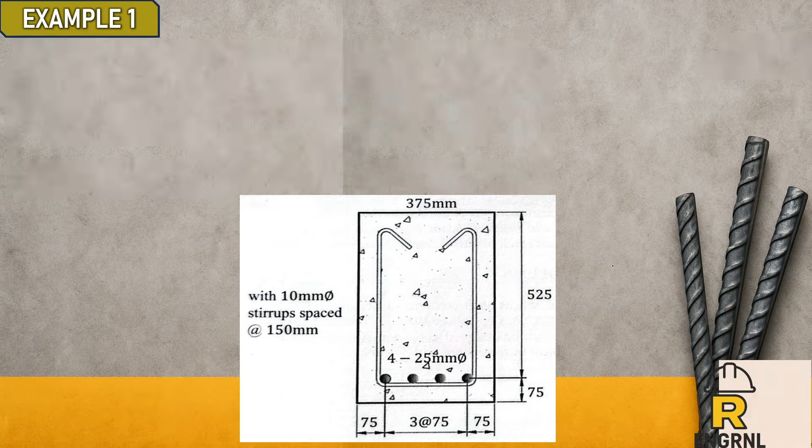Okay. Sampulan na natin agad para hindi nyo makalimutan. Okay, gamit tayo ng laser. Para may apply natin yung mga codes na yan, try natin magbigay ng beam, tapos i-develop natin, or pahabain natin, ano yung required na development length ng 4 bars na ito for 25 mm, no? With epoxy coated. fy 414 and f'c is 24.1.

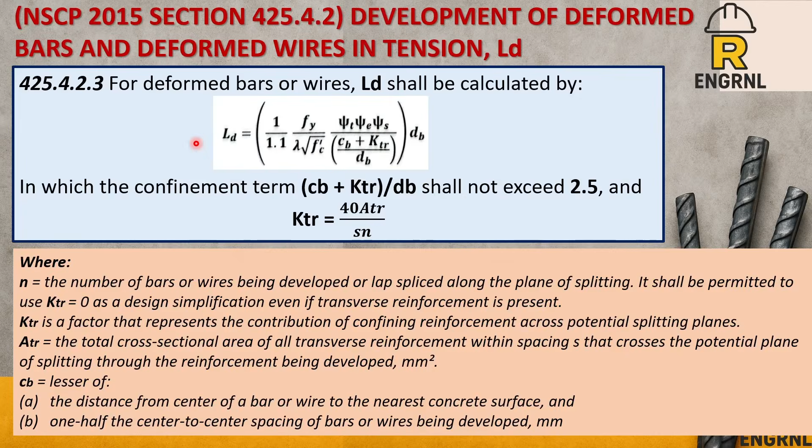So we will use the 3 or the 2 provided tables kanina. So, alin nga ba dyan yung better? Kasi kung titingnan natin, mula dun sa provision, dalawa eh. Sabi niya naman or. So, bakit hindi and? So, kasi this section 425.4.2.2, sabi na natin, ito yung mas conservative, no? Tinatawag natin siyang alternative way, no, to solve it. But this pangalawa is a more comprehensive, at detailed, kung masusunod yung kanyang mga parameters.

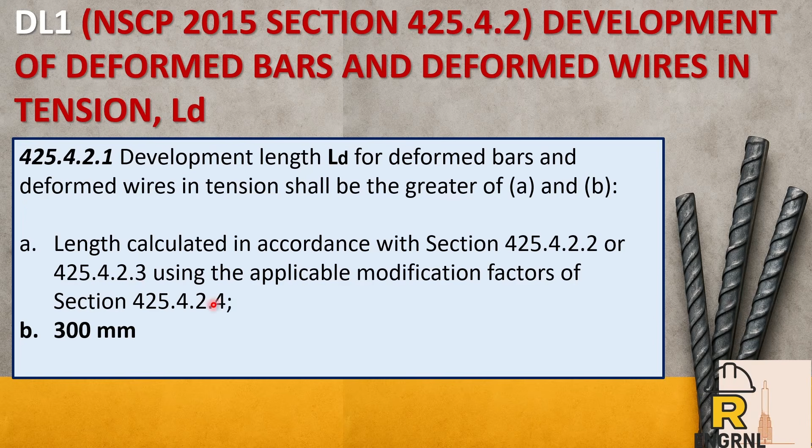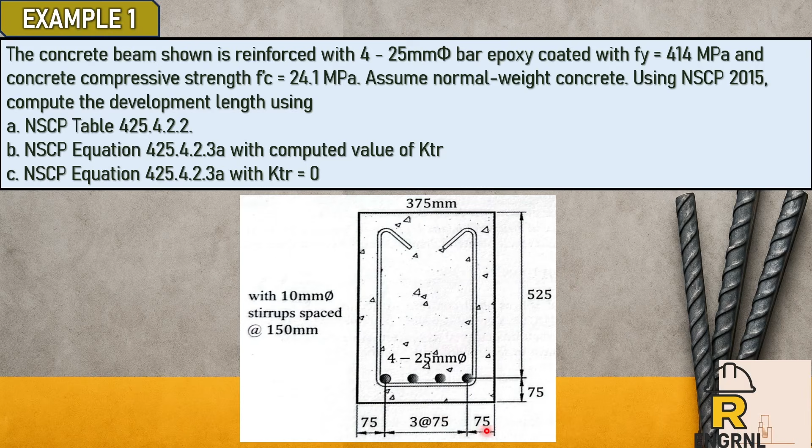At ito namang section 425.4.2.4 is yung mga modification factors natin. So if we apply with the 3 conditions, makikita nyo kung alin dyan yung mas mahabang LD natin. So binigyan din tayo ng 10 mm na stirrups, space at 150. Tapos tingnan nyo yung mga spacing niya, no. So itong apat na bars space at 75, tapos yung cover natin mula sa center 75. Okay? Gagamitin natin yan mamaya.

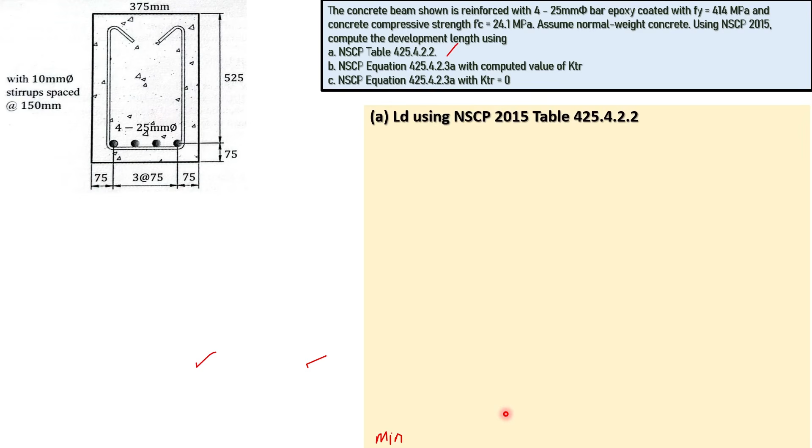And gamitin natin yung first table. So using for 25 mm bar. So alin dito yung gagamitin natin? Okay? Observe mo naman yung kanyang case 1, case 2 as mentioned kanina. Pasok naman to, no? Pasok tayo dun sa first row. And this is 25 mm bar. So ito gagamitin natin. Again, the letter A is the more conservative, and sabihin na natin mas simpler.

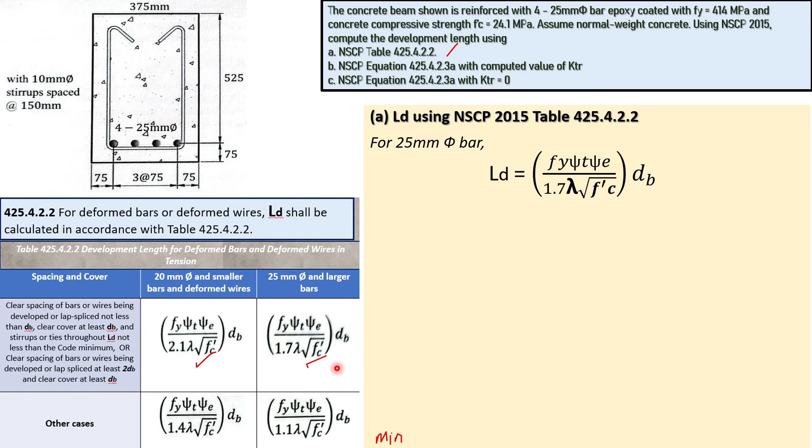Okay? So let's put that formula and let's get our psi T and psi E in the modification factor table in point 4. So pag sinabi nating psi T, the position. So sabi ko kanina, this is placed at the top bar kapag more than 300 mm yung kanyang concrete sa ilalim. Okay, dahil, position at the bottom bar pala tayo. So, ibig sabihin, hindi siya top bar, hindi siya 1.3, doon siya sa other.

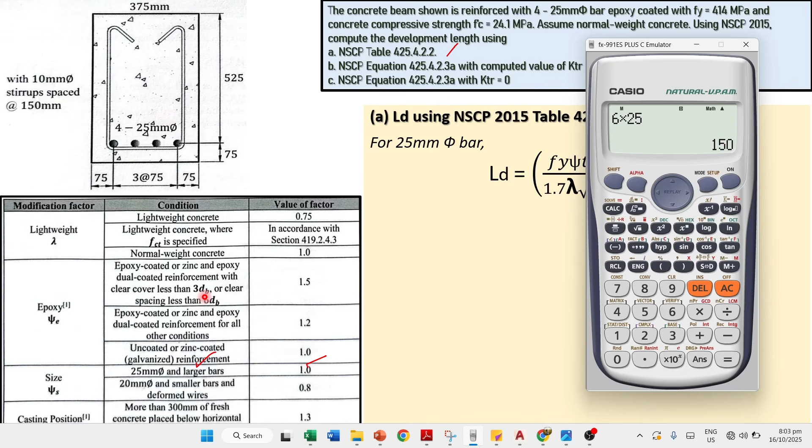Okay? So, next, psi E is the epoxy. Actually, binanggit na epoxy coated, no? Dalawa kasi ang epoxy coated. Itong 1.5 tsaka 1.2. So, alin gagamitin natin? Pasok tayo doon sa clear spacing sabi niya ng less than 6 dB. So kung kukumpitin natin yung 6 dB, yan, so we have 150. Sabi niya less daw dyan yung clear spacing ng bars. Pasok tayo dyan. Okay? So kung hindi na-satisfy ito sa number 1, dito tayo mapupunta sa 1.2.

Yan. So ibig sabihin, ang mga parameters natin ng psi ito, including the lambda which is 1 normal weight. Ngayon, pwede na nating kunin yung product ng psi T and psi E to check if it is satisfying 1.7. And na-satisfy naman niya. Good tayo dyan. Kapag hindi, or lumampas tayo ng 1.7, you will use 1.7 as your psi T times psi E. Then, substitute na natin yung kanyang mga parameters.

So, this is also more than 300. Okay? As you remember, dalawa yon, no? Letter A and letter B, 300. So, pasok yun. So, we will use 1,860. Tandaan natin yung haba niya, 1,860. Then, compare natin dun sa makukuha natin sa letter B. So, punta tayo dito sa mas detailed na may computed na KTR.

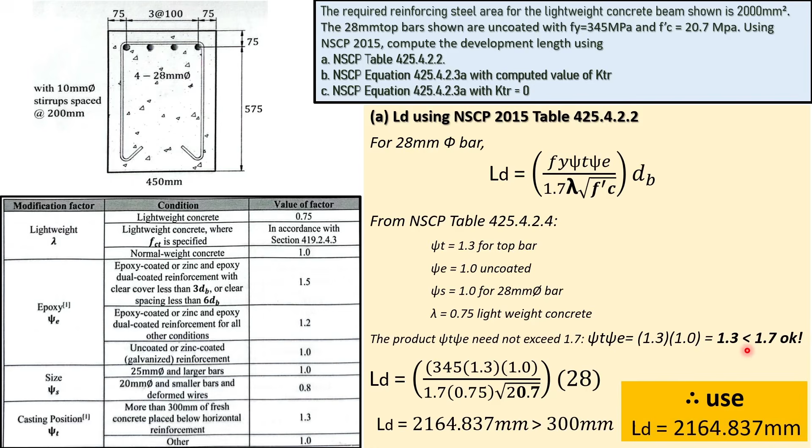Using the formula of LD, the equation of LD na mahaba, kunin natin yung KTR muna. Yung SN natin is 200 times 4. CB is nagbago yan, 75. Tsaka yung pagitan ng dalawang bar is 100 na, plus 1 half nun, is 50. Substitute lang, and we have 2.066.

Okay, pasok pa rin tayo dun sa 2.5 na limit. Pag sumagad sa 2.5, 2.5 yung gagamitin natin. Finally, substitute.

Same same modification factors. Then we have LD of 1619. So yun yung sinasabi ko dito.

Actually, pasok na sana to kung gugustuhin natin, but this is above the limit na, kumbaga above the required din. So if you have the excess main bars, kailangan hindi din siya masyadong mahaba.

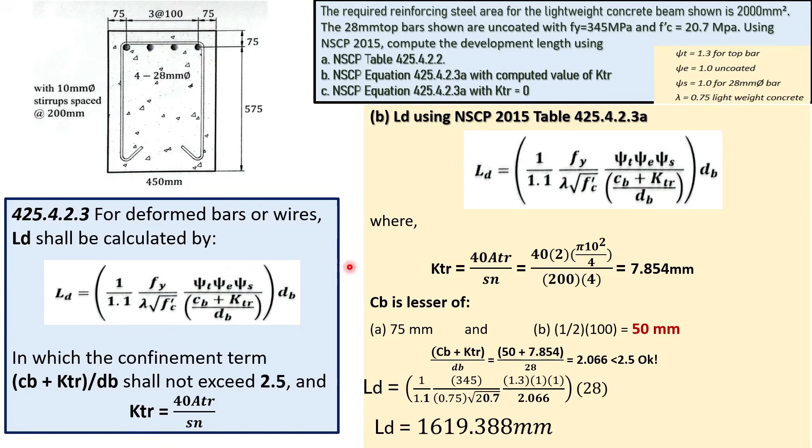So paano yun? Binigyan tayo ni code, ito yun, patunay na kailangan nating i-reduce yan. The reduction of development lengths defined doon sa mga tables na yun should be permitted by the use of this ratio, AS required over the AS provided. I-multiply lang natin yan dun sa development length natin. Pero sabi niya, provided, may prohibition din yan.

Nandito siya sa cases na A to E. Sabi niya, kapag pasok siya dito, hindi ka dapat mag-reduce kahit na nag-excess ka pa. In seismic force resisting system in structures assigned to seismic zone 4. So kapag nagko-consider tayo ng SMRF, yun. Madalas ito naman yung nangyayari.

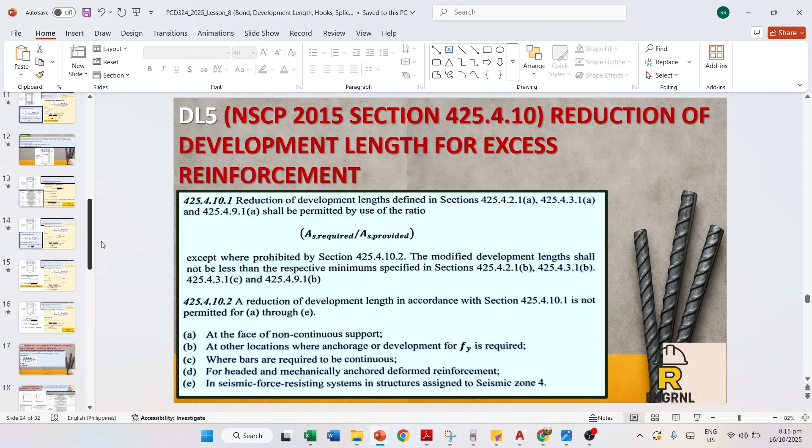Kunwari magre-reduce tayo. Paano tayo magre-reduce? Yung na-compute nating LD, i-times natin ang ratio ng AS required over the AS provided. The AS required is 2,000 and the AS provided is the 4 na 28. So finally we have LD of 1.3 lang.

So sayang din yung haba na 30, almost less than 300 mm, 1 foot almost, eh 4 yun no? So maganda-ganda pag nabawasan. So we will use LD of 1,300.

Paano pa kaya kapag siniro mo pa yung KTR mo? Pag siniro mo yung KTR mo, gaya ng ginawa natin kanina, substitute lang ulit. Nabago lang yung ating KTR dito, 0 na siya. 1.873, so ang laki no.

Kapag siniro mo yung KTR mo, ngayon i-reduce mo siya, 1.5 lang kapag nakasiro yung KTR mo. Pero that is di hamak na mas mahaba pa rin to sa actual. Pero kung gagamitin mo yung nauna, mas mahaba pa rin yun. So kung ako, if I will choose to be more economical, dito ako sa letter C. Pero kapag mas gusto natin na makasiguro or safety, kung may budget ka naman, letter A.

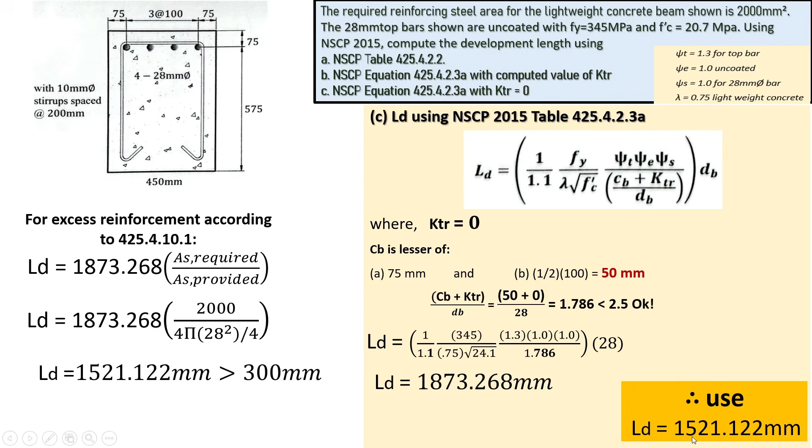So yun natin iintindihin, ganito natin iintindihin yung development ng tension reinforcement ng beam. Kung papansinin nyo, bakit ang haba? 1.5 or di ba lahat na na-compute natin more than 1,000, or sabi natin 1 meter? Kapag dine-develop natin yun, i-straight ko lang para ma-visualize natin.

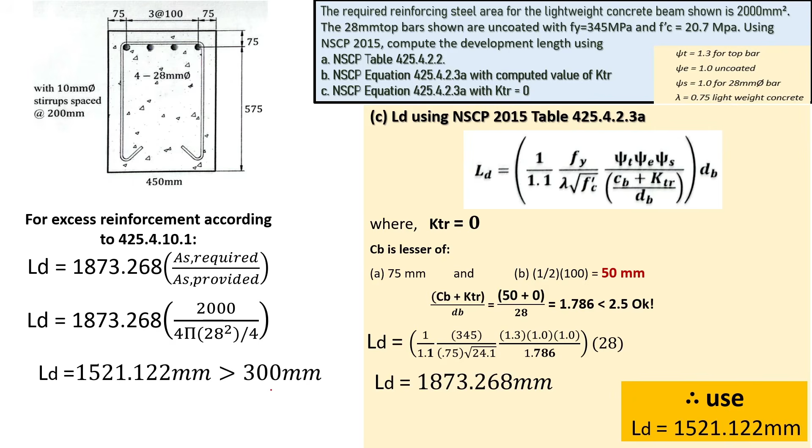For example, you have the column ganito, tapos may continuous beam ka. Dito tayo magmi-meet sa joint. Ang bar mo, halimbawa dito, may endpoint ka na dyan, column din. Ito lang yung ating main bar mo for example. Ito lang yung clear span natin sa beam, this is the clear span. Nagkakaroon tayo ng development length sa both side.

So like, you have 1.5 required, ibig sabihin i-extend mo pa yan ng 1,500. Yun yung tinutukoy. Kung dito naman sa kabila, kinumpute mo rin, nakakuha ka ng iba, extend mo rin yun sa kabila, kapag continuous beam. While kapag nasa endpoint ka, kung 1,500 yung kukumputin mo o ilalagay mo, pwedeng tumagos yan.

Paano kung ang column mo is 400 lang? Pwede sobra-sobra yung development length mo, hindi pwedeng tumagos yun. Ang ginagawa is may provided tayo o provision tayo na magkaroon ng tinatawag na development hooks. So i-bend natin o mag-anchor tayo na equivalent dun sa LD natin.

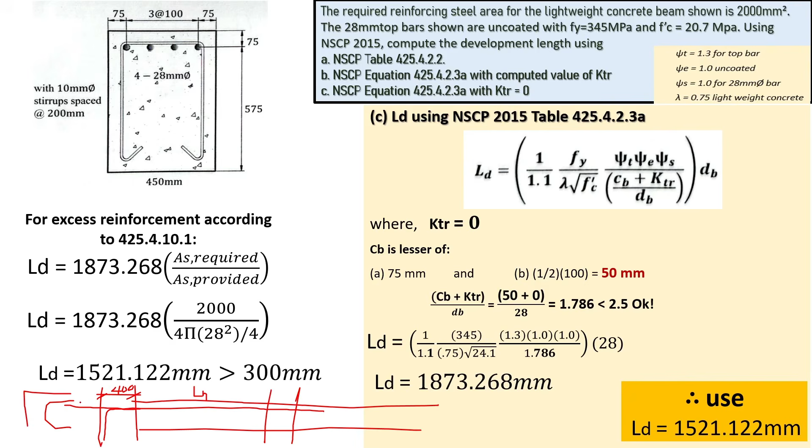So may dalawang klase yun, 90 tsaka 180. Yan yung next nating pag-uusapan sa next video, dito yon natin pag-uusapan. So be excited on that, nawa na-enlighten kayo sa development length provided by the NSCP 2015.